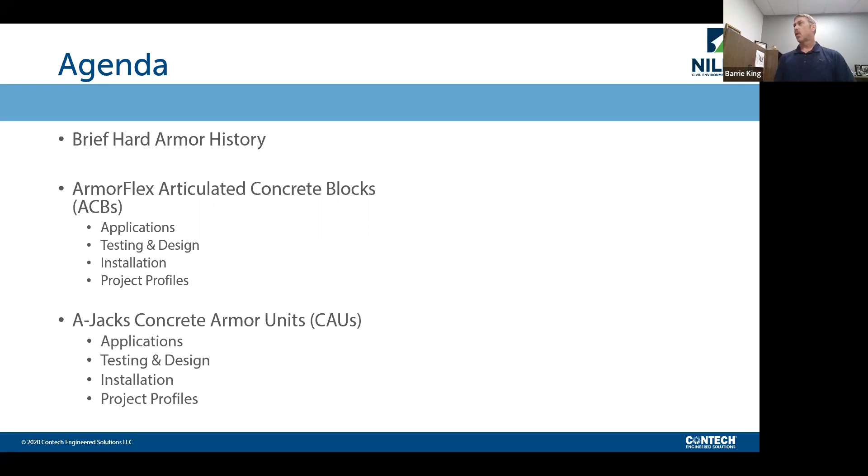Mostly for this presentation, I'll be focusing on the ArmorFlex ACBs. So if you have any kind of question, I believe there's a chat somewhere that you can access. You can put it in there to log it in so you don't forget it.

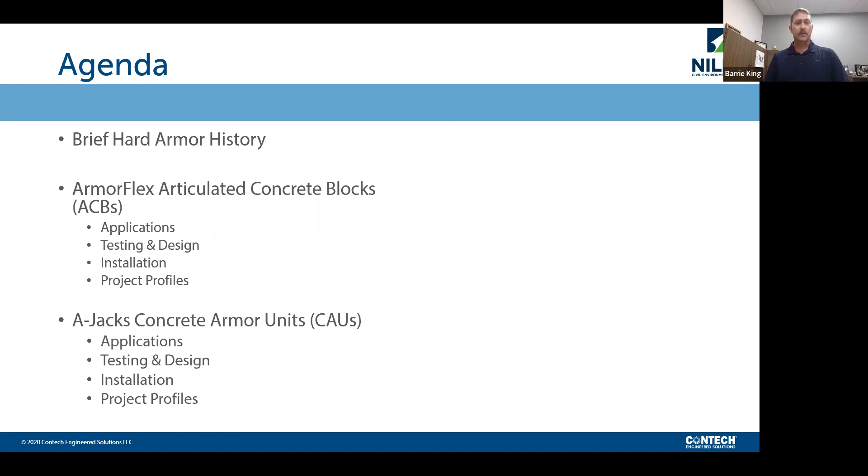Revetment blocks, ACBs, different names, but the same factor of safety, the same mechanism of failure. Here in North America, 1978 is where we started seeing them, and then you kind of go through the legacy there of testing.

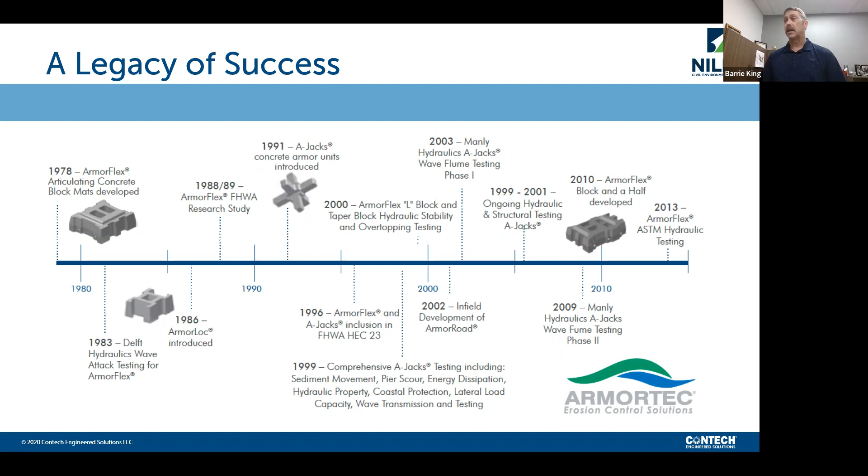So just to kind of give you an idea of the confidence you can depend on when you're designing these. As a designer, there's risk involved, not knowing where these systems come from, and more importantly, not understanding how they are in factor of safety. There's risk associated there, so I'm here to clear some of that up and show you what these can do.

Starting with the articulated concrete blocks, it's a flexible interlocking matrix of concrete blocks, uniform size, shape and weight, cabled together if you would like, for quicker installation.

I should note that cabling is not required in the factor of safety as far as ASTM International is concerned. It is considered a redundancy. We'll get into that a little bit, but a lot of it has to do with how do you test the tension actually happening in that cable if it's installed in a full-scale flume, say in the Netherlands testing lab, or Delft Laboratories, or Colorado State, my alma mater.

So they can be used individually without cabling. There is redundancy there with the cable. So specific hydraulic capacities are substantiated by ASTM testing, with not just the ArmorFlex type, but that is for all ACBs out there. Mattresses or hand placed, like I mentioned.

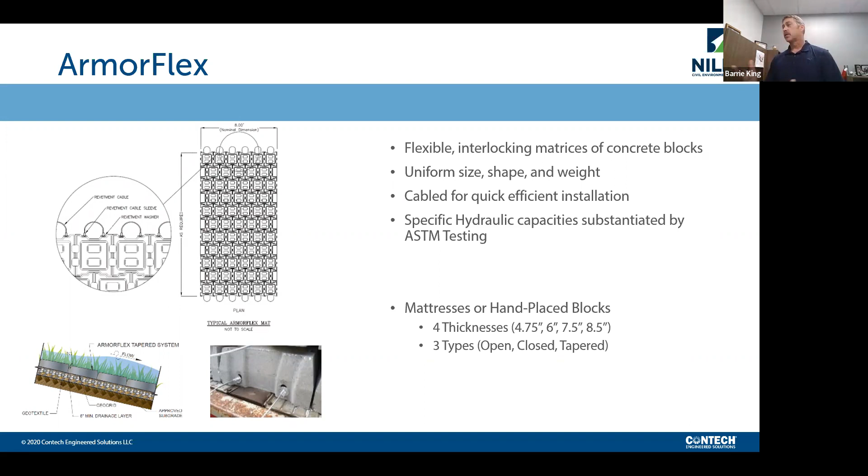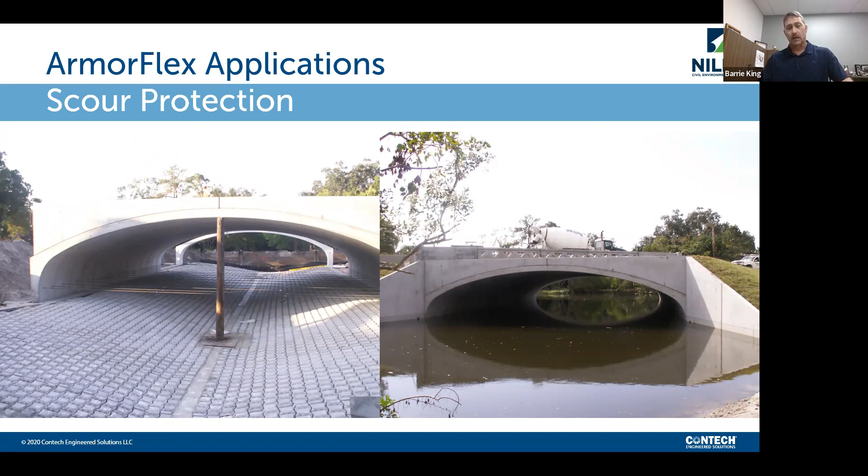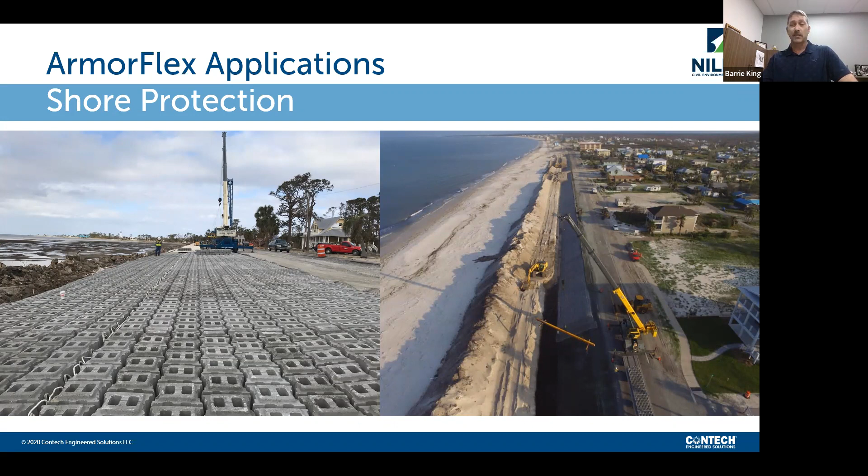And you can use them for a bevy of applications. Here you see scour protection. This is a full invert. And then shore protection, obviously. These are also qualified for wave attack, using Pilarczyk's equation for solving wave attack. That's kind of the guideline across the country, across the world really, and what they use to size revetment when you're seeing shoreline coastal challenges.

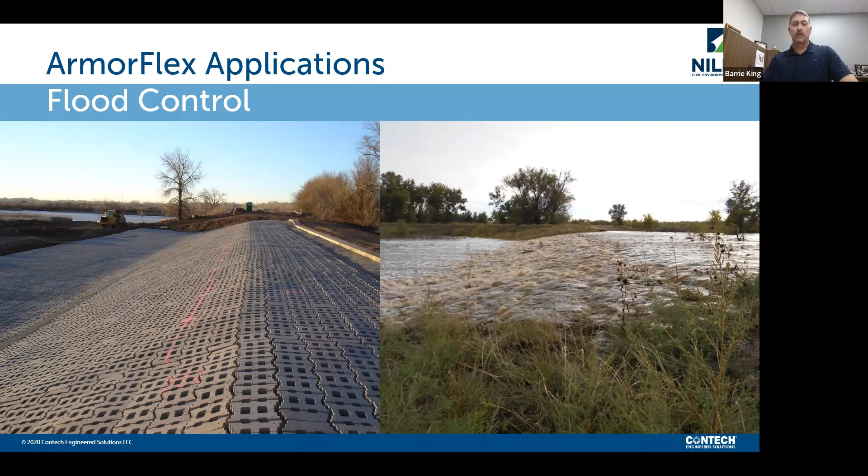Flood control. Here you see a low water dam. This is out in Colorado, Fort Collins. And then here you channel lining. This is, again, scour protection, but you can really get a sense, this is in Missouri, of the vegetation possible. They're on the left right after construction, and on the right 6 months through the growing season. That's what you have. If you look real close in that right-hand picture, you can see the block down at the water line.

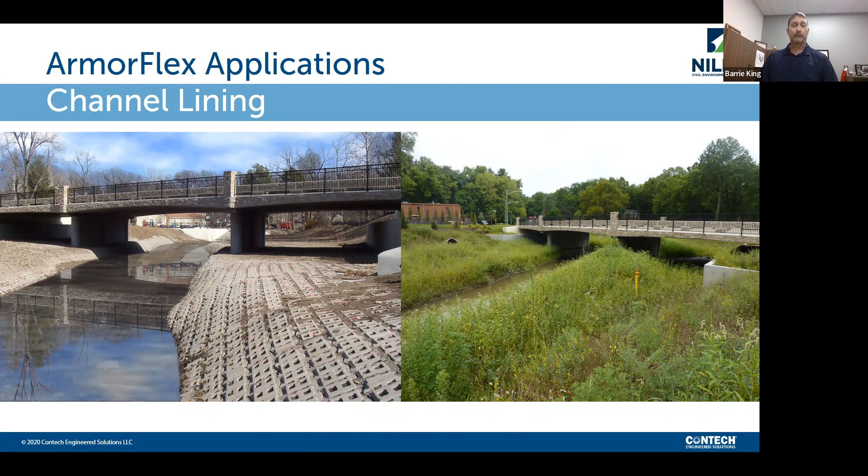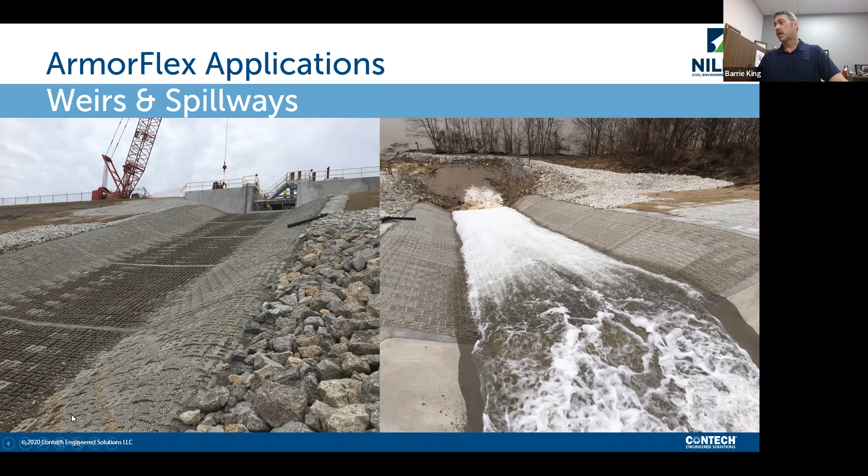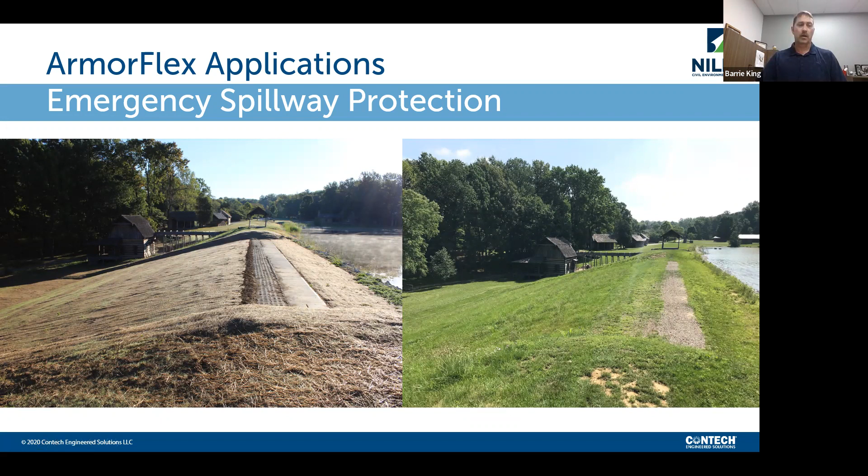And then emergency spillway protection. That's a bread and butter application that we see down here in the States and across North America really. And again, this site is more of a park setting, but it had seen flow, it had seen flooding. They needed something that would hold up to the PMP event, and also have it aesthetic to match the surrounding park, and that's what you're kind of looking at here.

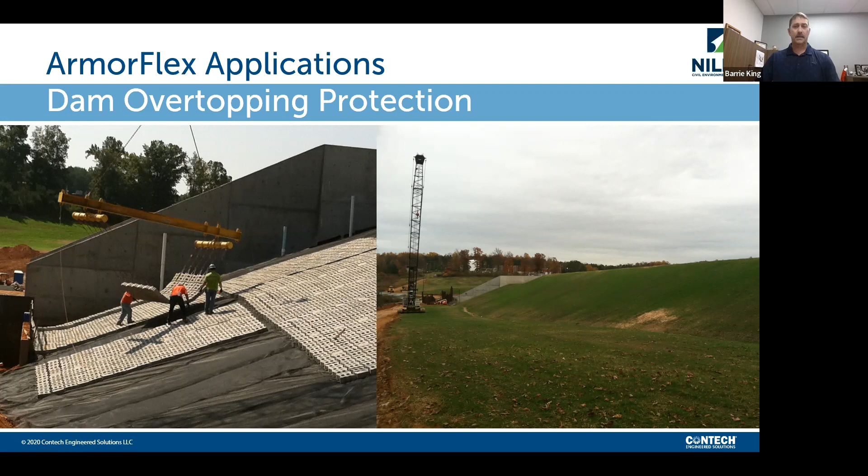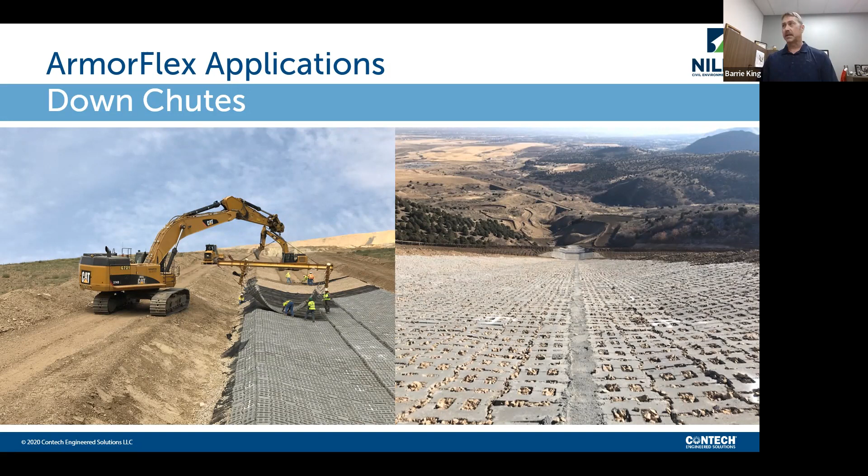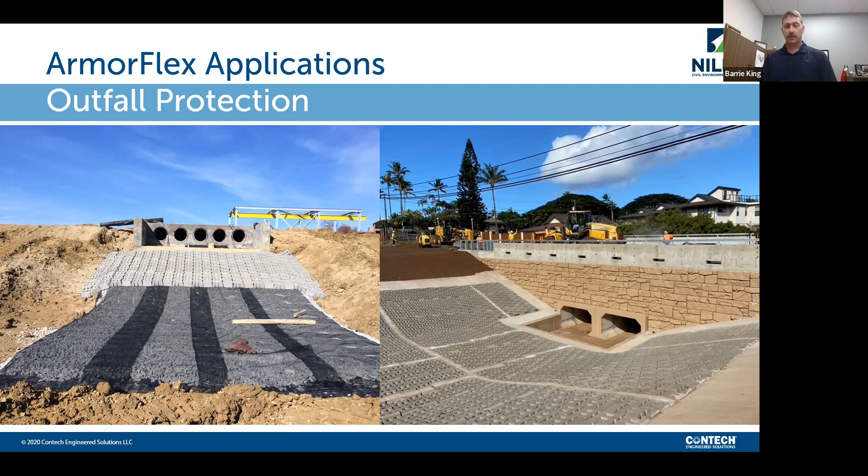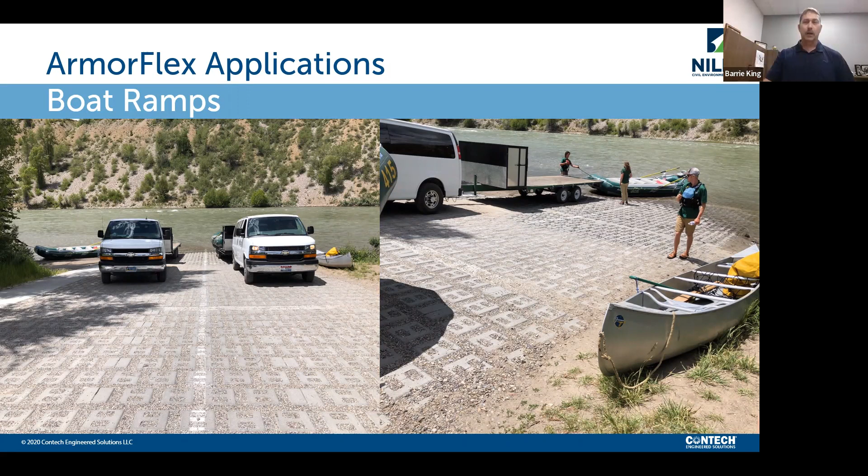Just a little bit of everything with these systems, the ACBs, and they're another very typical application you can see. When you're talking about boat ramps and low water crossings, you do want to think about your saturated soils and what you use for subgrade improvement there. Saturated soils don't behave very well for wheel loads, depending on the soil type. So typically when we see these, there is some soil improvement, i.e. crushed clean stone, maybe a layer of geogrid just to lock everything in and speak about longevity there. So yeah, another very typical application.

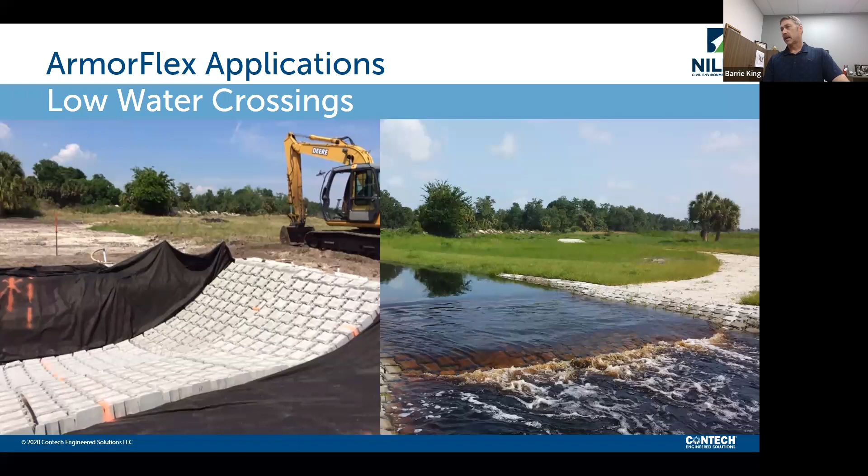But all these applications, they have to be based off something, right? And so testing and design, as engineers, as specifiers, that's very important. So you want to know the capacities of these systems you're using, whether it be a steel I-beam, a concrete channel, girder, or ACBs as erosion control. You want to know what they can do. You want to know how they've been tested. What are the redundancies there, and how conservative is the design? So things like that that we'll cover.

I will speak right now about ASTM International. This is an international standard. Well, it's international standards.

So when you're talking about ACBs and you want to know what they can do hydraulically, you have to look at compliance testing. And there on the left is D7277. That is the actual test - what you do, how you set it up, what grades you put your block on. And these are all full-scale tests.

So for our example, we were at 2-to-1, 115 feet long, and we put 5 foot of head on this dam, or on this channel, 5 foot wide. And the resulting velocity was upwards of 35 feet per second with shears of 20. So very strenuous hydraulic conditions there.

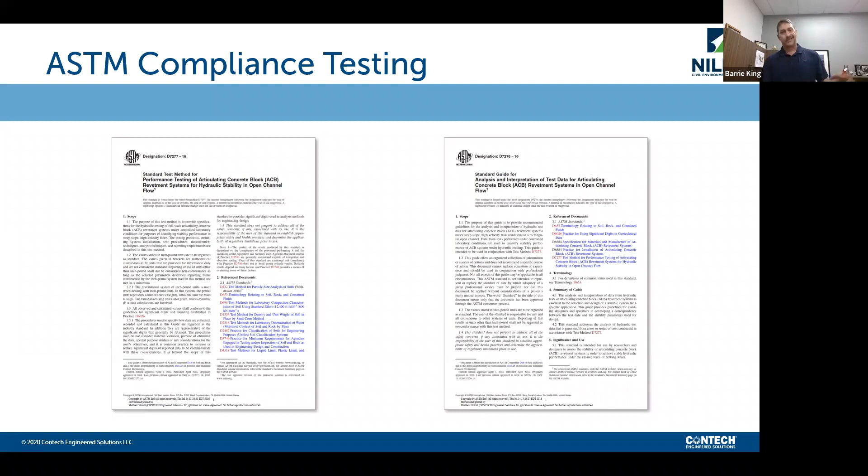So again, ASTM compliance testing, very important. It's worldwide, it's an international standard. Again, just to hammer it home, it's my one soapbox.

You know, you have your parameters, you know what your soil is, you do flow duration. So you do 1 foot overtopping for 4 hours. You check and see if there's any damage. You keep going until you have defined failure, which is loss of intimate contact - that is the system itself lifting off that subgrade. And that's what they measure.

And then you take those, and again, you take them into the next standard, D7276, and that's where you're doing the interpretation, determining the Manning's. What is your critical velocity? What is your critical shear? Things of that nature that actually are good to know when you're designing hydraulic structures and the like.

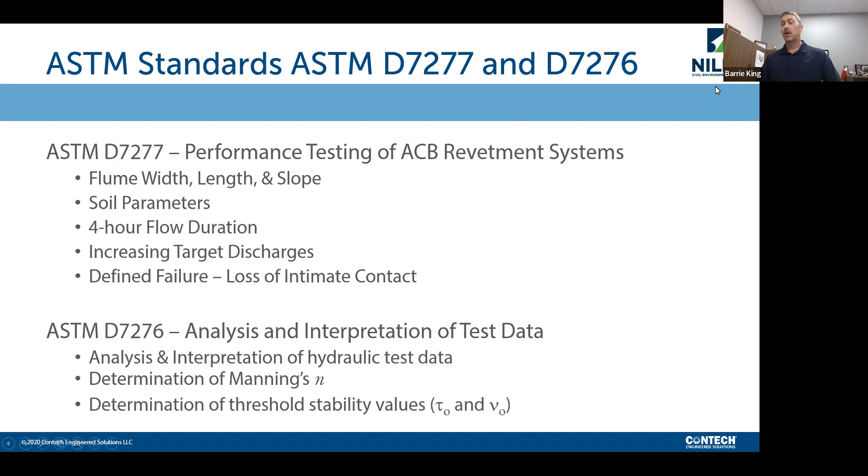And after all that rigmarole, and thank you for listening to my diatribe on testing - it's very important across the international design community - you will get something like this. This is Colorado State, Dr. Chris Thornton, director of that, and you will get the capacities. Now, this is the summary sheet, so it is a report detailing exactly what was done, how it was interpreted, and following as dictated by those ASTM standards we mentioned earlier. There's one way to test it, and there's one way to interpret it. This is kind of what you get.

So if you look down there on the right, we have 35.5 feet per second and 20.1 pounds of shear, at a 5 foot overtopping. That's moving some water. To give you an idea, I am - and I'm going to be kind to myself since it's right after Thanksgiving - but I'm about 6 foot, 200 pounds, and rule of thumb is 6 inches of water flowing 10 feet per second would take me off my feet.

That's how powerful water is. Everybody's done that, everybody's stood in the stream. Depends on your stance, obviously, but in general that's a good rule of thumb. Here we're talking about 35 feet per second, 5 feet deep at the head box. So that kind of puts your head around what that means physically speaking.

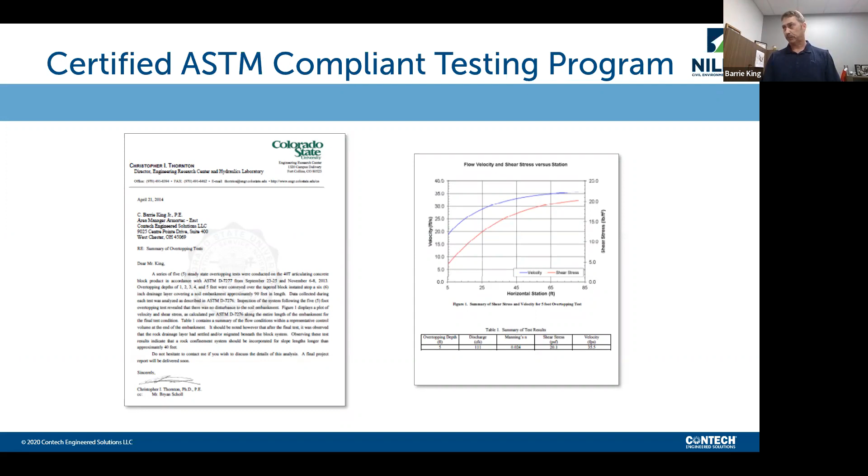And then when you get through all the testing, you get assigned your capacities for your system, whether it's ArmorFlex or another system. Again, everybody has to subscribe to this if you're going to use these. You have to go with your design methodology - NCMA, which is the National Concrete Masonry Association.

It's no different than what you're going to find in the federal documents with the U.S., or even over in Europe. I mean, you are going to see the same math. This is just a good, user-friendly way to interpret it and work through it. So that's why you see here - it's the factor of safety, is what it is.

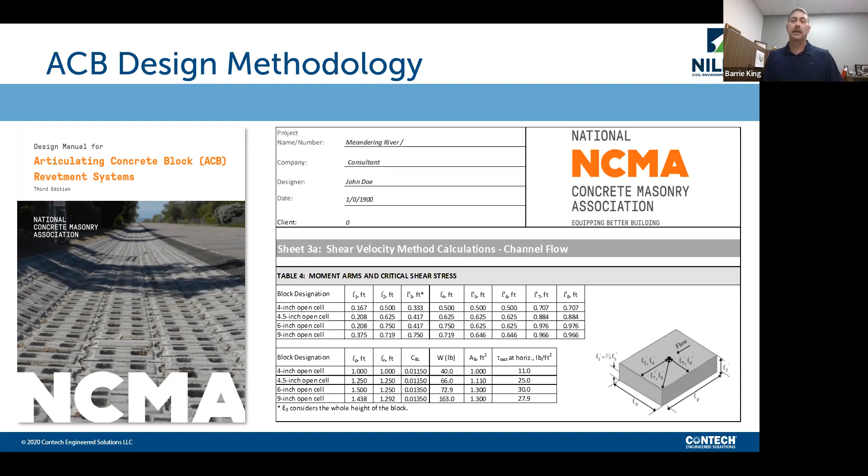That's for those spillways out in the monsoons in New Mexico, and for those steep channels down in Kentucky or up in New York that we're seeing them. And really, Pennsylvania is another state that has really put these to the test—let's build this, and not only are we going to build it, but it's going to see water on an annual, if not biannual basis, and it's going to see the design discharge. Seeing that happen really gives you a lot of comfort that everything you're working through the math on is really worth it and actually true.

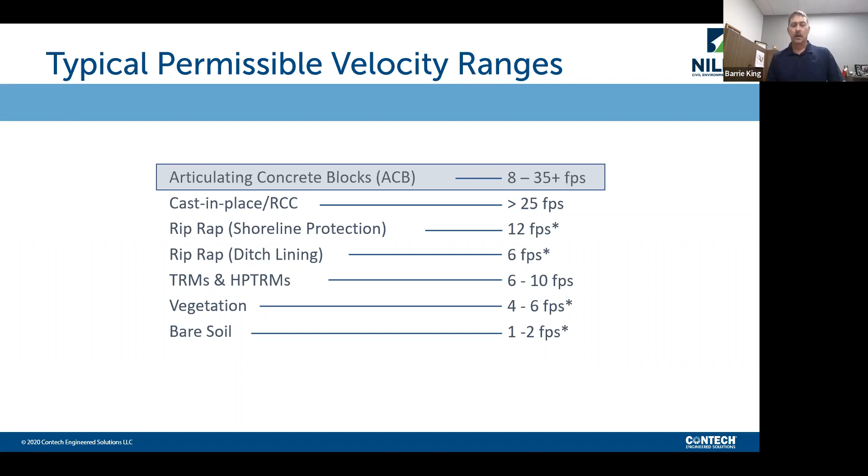A lot of times, half of that they expect to move. It does move, so you'll actually put a double layer there because the rocks are undersized since there is a gradation involved—you'll lose some of the smaller stuff, and the bigger stuff starts to tumble. This is a mechanism I used to see at VDOT, Virginia Department of Transportation.

We used to dump rock all the time—it was one of the big expenses of our district. So this is just a nice visual to show you as you move up in velocity into more severe environments, these systems make more and more sense. They can not only save money on material, but imagine hauling all that rock—especially nowadays that costs something. So looking at that cost benefit of what can be done there, that's really what can swing a project sometimes, because budgets mean, if not everything, they mean a lot.

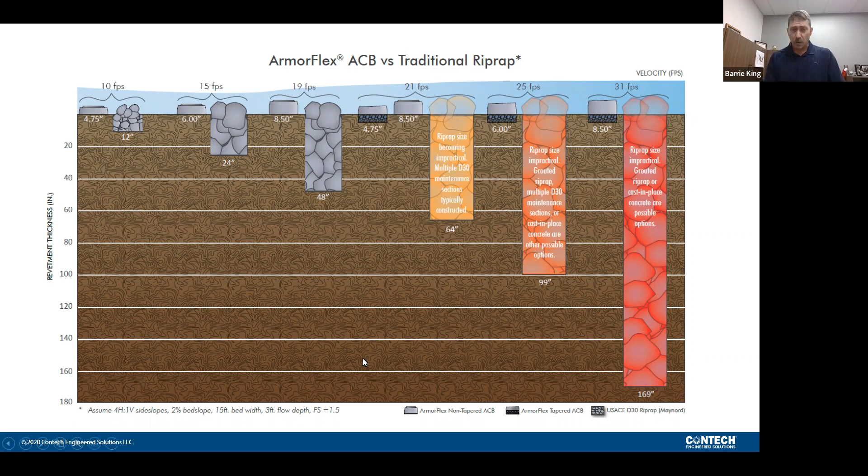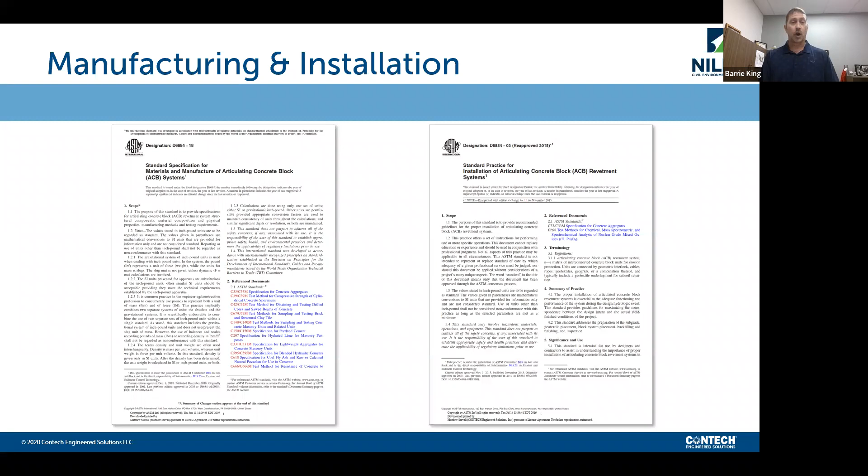But in this case, it provides comfort, because you're used to using rock and maybe cast in place and some other materials, and you want to know this isn't just something out there in the ether. This has been vetted, and there is a way to manufacture it, a way to place it. Again, a big dirt job—it's all about having the competent dirt and getting those proposed grades hit, and then you armor them with something for the design flows.

So another slide on ASTM manufacturing—everything's covered there, QA, QC, it's all listed, the cycles and the molds. And then 6884, that's the installation. There's not a question of 'hey, is this okay, well let me see'—okay yes that's okay, or no that's not okay. You have to get it to this compaction or whatever that is.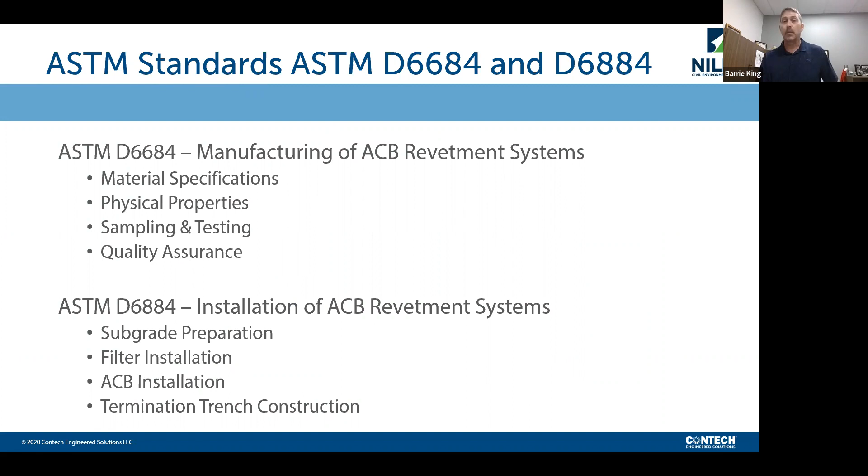So ACBs according to ASTM—you hydraulic test them, international standard, you run the analysis on that testing, there's an international standard for that. You do the design—there's many, many methods. I showed you NCMA, names for the method, but they're all the same method. The factor of safety is the factor of safety, the numbers are the same. NCMA is easiest to follow, but that's what the ASTM input provides.

You have to have the input from the previous testing to use that method. And then you go to manufacturing—okay, how are we going to make this? Do I make it like this? No, there is a manufacturing specification, very stringent for it, compression, absorption, any of that stuff. Installation, again, same thing. So thanks for listening to the ASTM part of it, but it is very critical, and you should know that has bearing on what these systems can do and how they are used.

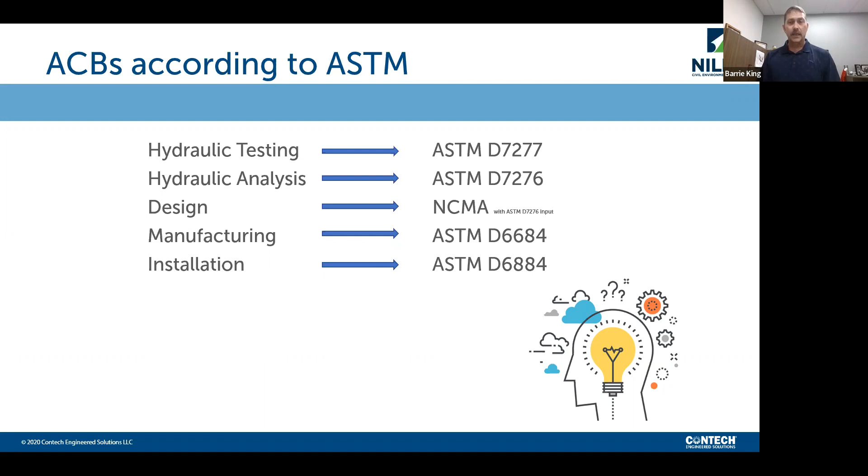So project profiles—see some things that were built here, near Herbert, Saskatchewan. I like this one, the Highfield Reservoir—it's really a flood control system, that was the problem here. You have various levels of protection, and what I mean by that, if you look in the left-hand picture up there in the top, you see that green—those are where the hydraulics aren't as severe, and you can use maybe a softer armor, something more cost-friendly to the site, because you don't need big bad ACBs or ArmorFlex since hydraulics don't dictate them.

And that's really what you need to understand about what to expect from Nilex and Contech: over-design is fine, but budgets are budgets. So recognizing where a softer, less expensive, high performance turf reinforcement mat or something like that fits, and recommending that for the site, whether on the engineering side or after it's been bid, that's critical. And that's what you're going to get here.

That's what I like about the Highfield—you're using a little bit of everything here. It had a tapered system, a combination solution, like I said. The support were the specifications, running the factor of safety, contract drawings, working with any kind of on-site installation assistance that was needed. The outcome, and we would know if it was bad, was the efficient installation, always finishing early.

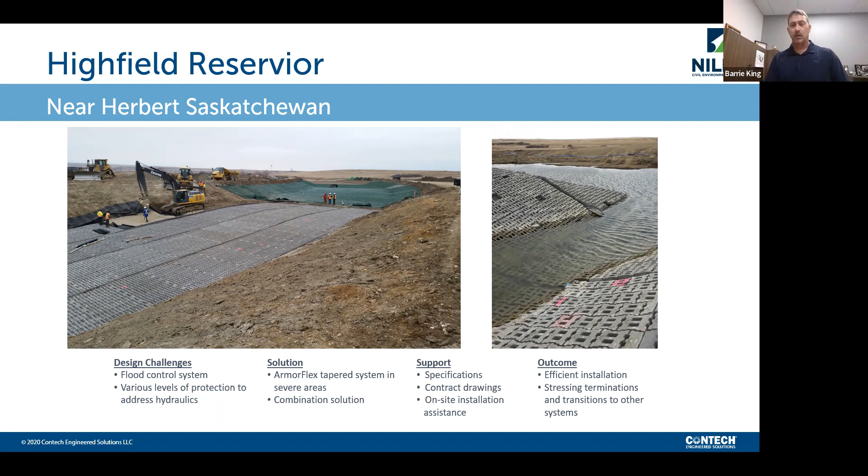Jensen Dam, something more project that's probably more recent. McGrath, Alberta. You can see the project location there on the right. This is a really good shot that was taken. A lot of things going on with this project.

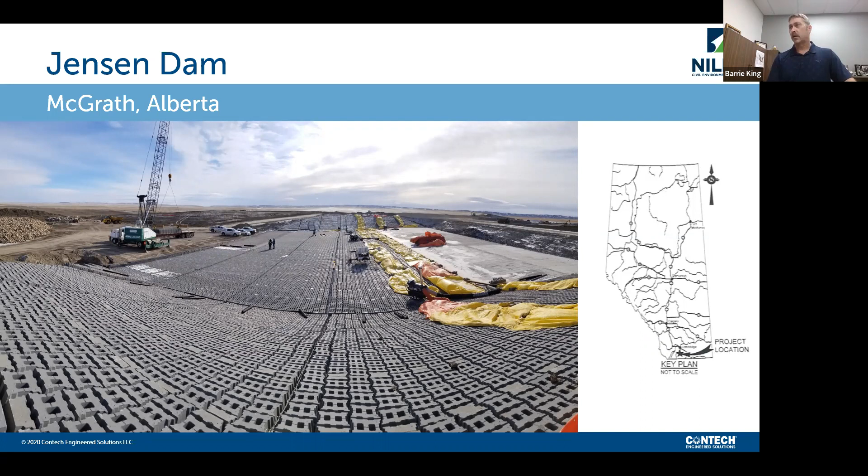The history of this site and what went on at Jensen Dam. I believe it always saw some kind of water. With the redevelopment going on in the surrounding area, more water was going to be directed into this area. So they needed to make sure they had a weir or channel, a fuse plug design that would work and pass this on a consistent basis. So at Jensen Dam, this is really what you're looking at in cross section.

Design challenges: the access was remote, the weather was tough during construction, and the timeline needed to happen fairly quickly. You get all that together and it makes for nervous contractors and suppliers, because we want to make sure everybody's hitting on the same cylinders and in lockstep. We really want to make sure we know what each other is doing, same with manufacturing. So having that dance going, trucks coming in delivering material, that being set, and more trucks replenishing - that's really what we shoot for, and what happened here on this site in McGrath.

It was a 70T system, a tapered system for the hydraulics, channelized configuration as you can see. The support included the contract drawings, on-site installation assistance, and our engineering services.

There were many iterations of what was okay - hey, we're going this wide or this wide, and do we still pass factor of safety? As we all know, plans from the ministry, or in my case the Department of Transportation, when I see plans like that, it's construction in heaven. We all know this as professionals in this construction business - plans are great, you've got to have a guideline and hold to that as much as possible. But things change, especially in these big dirt jobs, so you have to be responsive. And that's one thing I'm proud to say - Nilex and Contech are quick to see problems that can mean cost on site, and take care of those expediently.

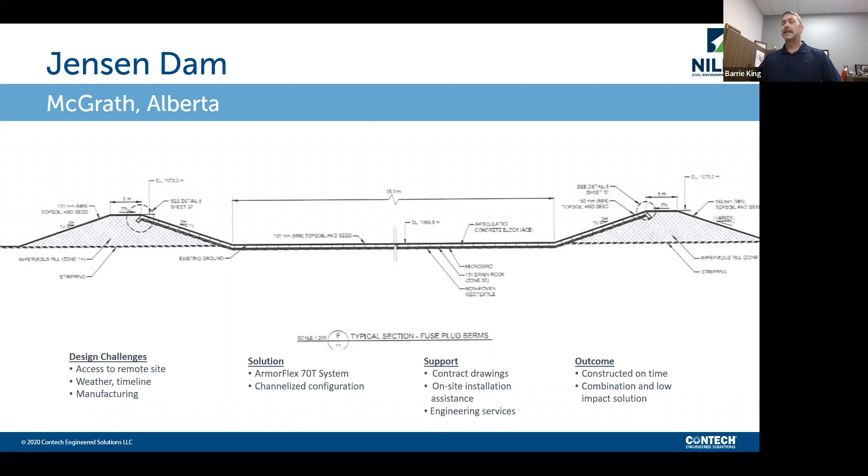More pictures here, you can see what's being done. See the snow in the background. I like this picture because it's conforming there - you can really see the articulation on the right-hand side. There's a big crane there, but it doesn't need to be a big crane. We commonly see excavators placing these systems. Here it was, hey we're going to set up and reach everything, and they had it on site.

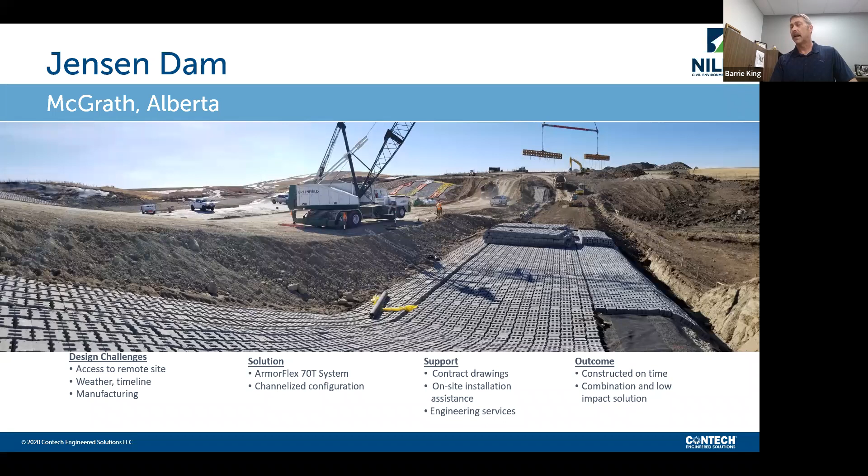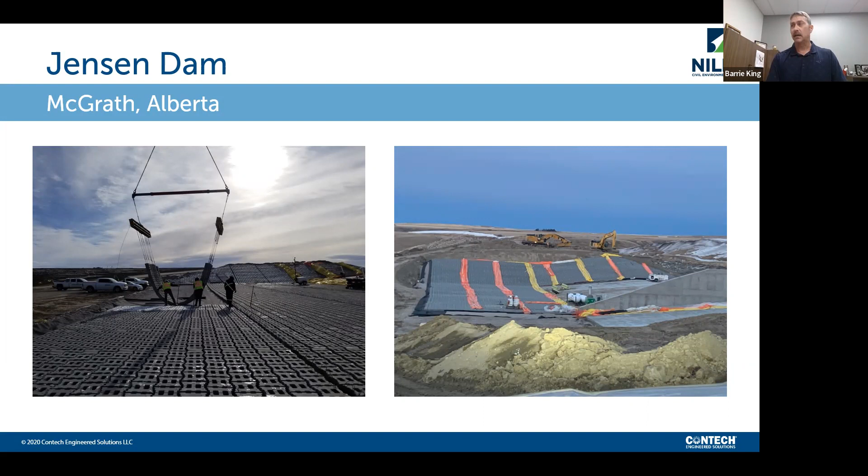So here's another application - Banff Legacy Trail flood repairs. As the flood went through in 2013, there was a really bad event that came through this area. I know Calgary is seeing that design being implemented now, similar to what this experienced. But in June 2013, they blew through here and just destroyed this whole area.

They needed to rebuild the trailway, and that's what you're seeing there. On the right-hand picture you can see it better - there's a trail paralleling that road, and cyclists go through there. You have this grassy slope, and after that got blown out and all that rock moved, they wanted to come back with something that would really promote vegetation. In the left-hand picture they're marching down station with the open cell ACBs, backfilling with loamy topsoil as you see on the right, with the ultimate goal of growing in native grasses and wildflowers.

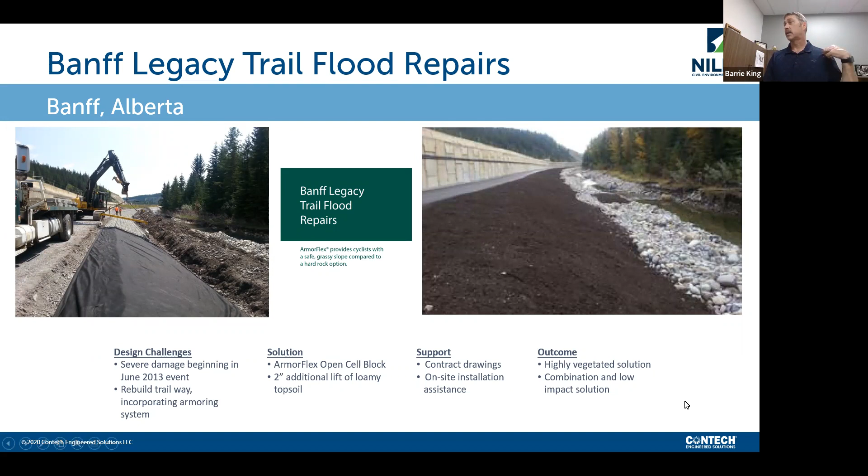That's always something I get a question on. If you plant those in the middle of August, say in Mississippi, you're not going to get much growth. So adhering to the growing seasons, oftentimes we'll see ACB open cells being placed in the winter and not backfilled or seeded until the growing season, because everyone knows you're not going to grow anything in the middle of February. So a very beautiful area and a very successful solution there for them.

Exshaw, Alberta, channel lining, bridge scour, a little bit of both here. You can see what's going on there on the right. It's about that train and about that infrastructure coming through here. It's a large drainage area, very flashy conditions, critical infrastructure, like I said. ArmorFlex.

70T, large riprap transition, as you can see there on the right. So in the less effective areas, flow ineffective areas on the top of the slope, that's where you can get away with something more dissipative. Again, same support, same outcome, but efficient conveyance here on the outcome. This fills up quickly and they needed it out of there. So a little bit less roughness with the ACBs provided that. It's not much smoother than the rock around it, but enough so you can play with your depths and make some efficiencies there. In this case, it made the difference in the design.

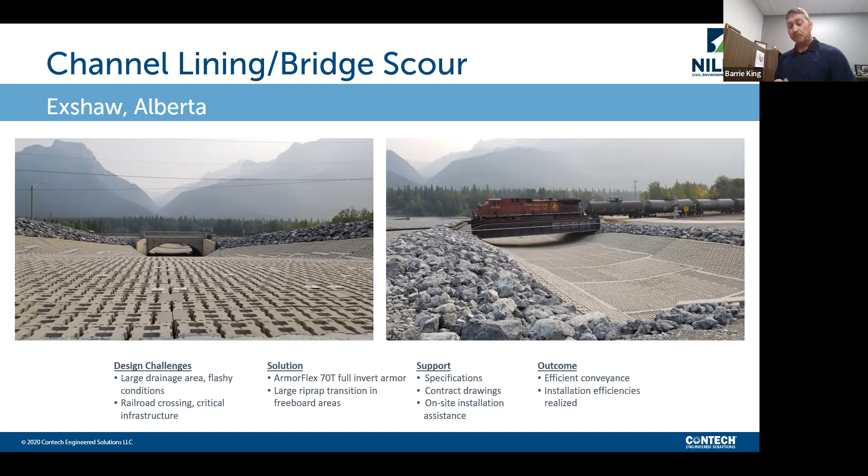Yeah, that's what I have for ArmorFlex right now. Again, just a really efficient system to get down with Nilex and Contech. You're looking at everything from layout drawings to factor of safety calculations, all that stuff is available. It's really about improving the confidence and improving the conservatism of these systems and what they're kind of adhering to.

And with that, I'm going to look at the chat.

Real quick, I got these questions on the ACBs. Is there fill in with the grid in the second section? There does not have to be. This is a great question, and I'll go back to the installation guideline, ASTM D6884. It speaks directly to the fill. There is geogrid in the second section, and that is for those higher velocities, those stones - they could have the potential to be excavated out through the open cells. So having a confining grid there is not for strength parameters or subgrade improvement. It's really a screen to keep those in place. The gradation on the rock is 1.5 to 2 inch minus with no fines - that's what you look for there.

Let's see, okay. And what I'll do, I'll just move on right now. Great questions, very common questions that we get. So let me go ahead and close that.

A-Jacks, what are they? They're funny looking. You played with them when you were kids. Just kidding, I'm not from the 1940s.

All joking aside, they are an energy dissipation unit, and I'll go through this quickly. But they're really something to look at, and by all means, very effective.

Interlocking high stability armor units - they come on pallets, they come on skids, so they're easy to get to the site. You do random and uniform installation. The only difference is with random installation you'll probably use about 5 to 10% more. Uniform installation is actually quicker to install and you use less units. You can do hand place or bundled placement, put them in groupings, like you kind of see in that top left-hand picture. It's a very rough layer - if this unit is fully exposed in the water column, it has a roughness of 0.1, okay, but how they're commonly used, we'll talk.

So that's fully exposed, water blowing through it. That's how they're tested to get their capacities in full scale.

That's from tip to tip, how they lay down when installed. 2 foot, 4 foot, 6 foot, 8 foot, and 10-foot units are available.

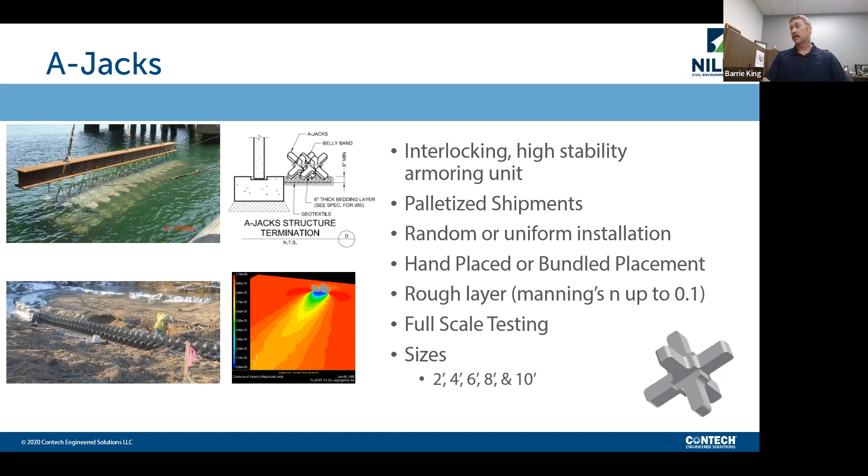So A-Jacks: scour protection, pier scour protection, and abutment scour protection on existing piers.

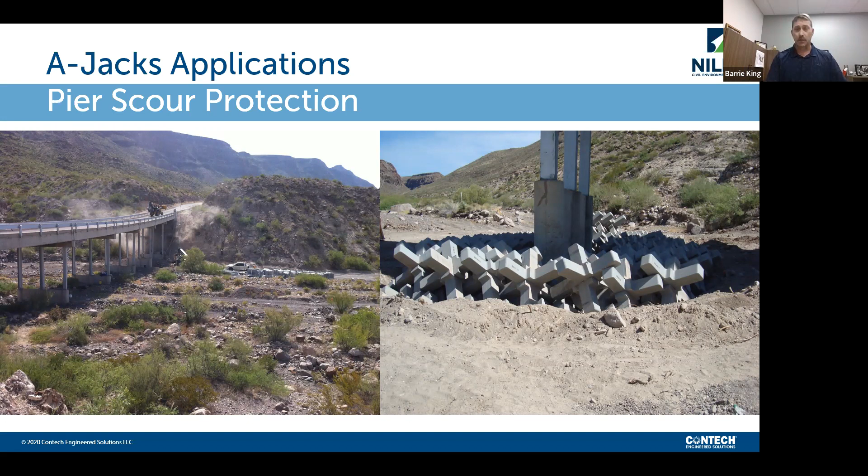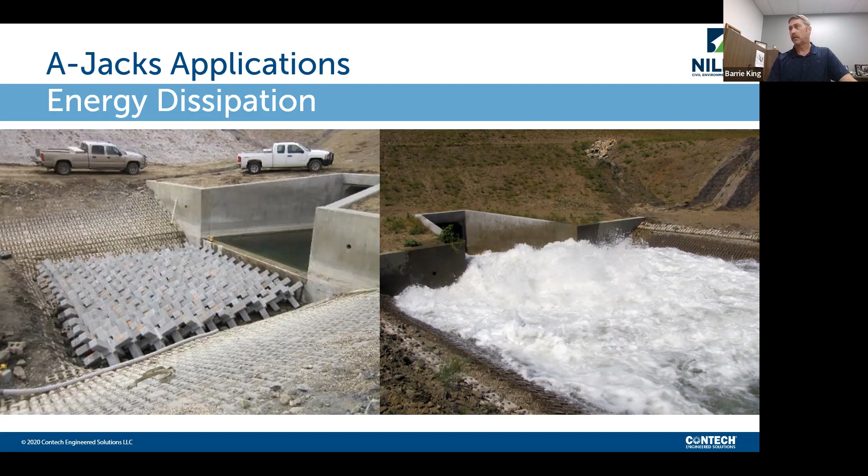Energy dissipation - this is an agricultural application, downstream. They turn this on and have to get it to dissipate before it goes downstream, because what was happening was it was tearing apart the sandy soils downstream. Velocities were too high.

Toe stabilization - yeah, they're on the left. You can see the softer cocoa mats being done, and then right at the waterline are the A-Jacks.

You see that in a lot of fill applications, or where they do impoundments or drainage areas or retention basins. You'll see that at the waterline sometimes, and that's where you're going to see erosion. What'll happen is it'll eat away at that, the bank will get steeper and steeper, and then it'll fail, and then it'll happen again.

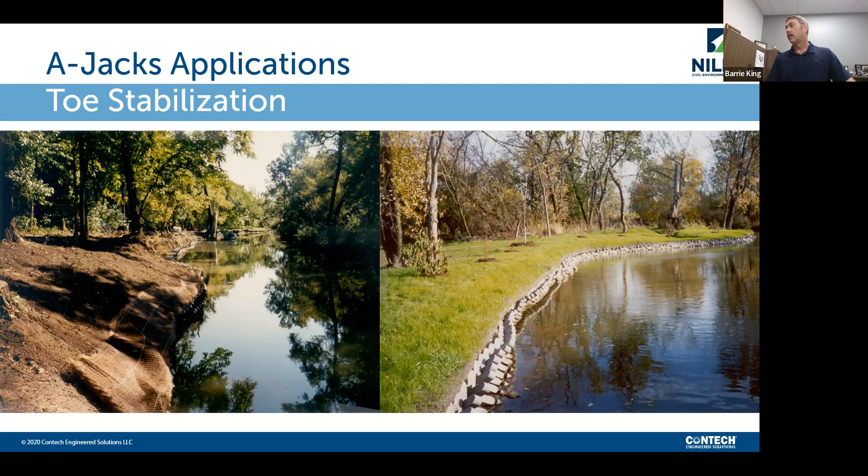And so you get that backward encroachment into whatever is there. Is that important? Is there a structure there, or is it more like you see on the right, where it's more of a rural area? So it depends.

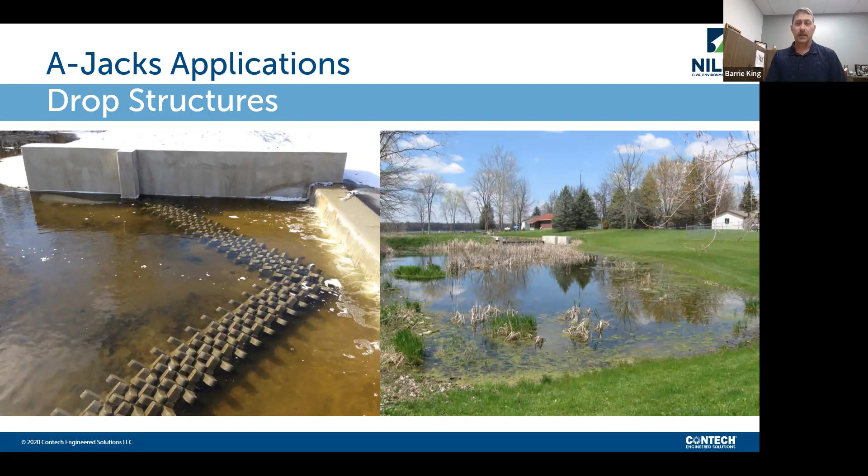A-Jacks, the drop structures - all kinds of configurations you'll see to dissipate energy. There on the left is downstream of a weir. There on the right, that's the application you're seeing in the background. They needed to smooth out this flow in the design event because it was tearing up this detention basin. Breakwaters.

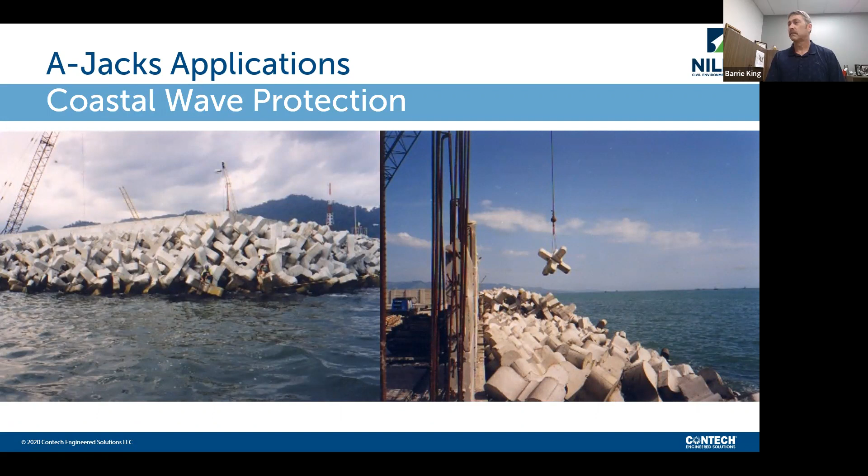Coastal wave protection and testing. So to get into the testing, everything from wave attack testing to channelized testing, all of that has been done with these systems ad nauseam.

The structural analysis was done in Auburn, the impact testing I believe was done at the University of Florida, stability testing at the University of Florida, wave attack testing by the Delft Laboratories out of the Netherlands, and pier scour testing done by Oregon State University, with a gentleman named Bill McDougall, who was one of the forefront people in wave attack design and countermeasures.

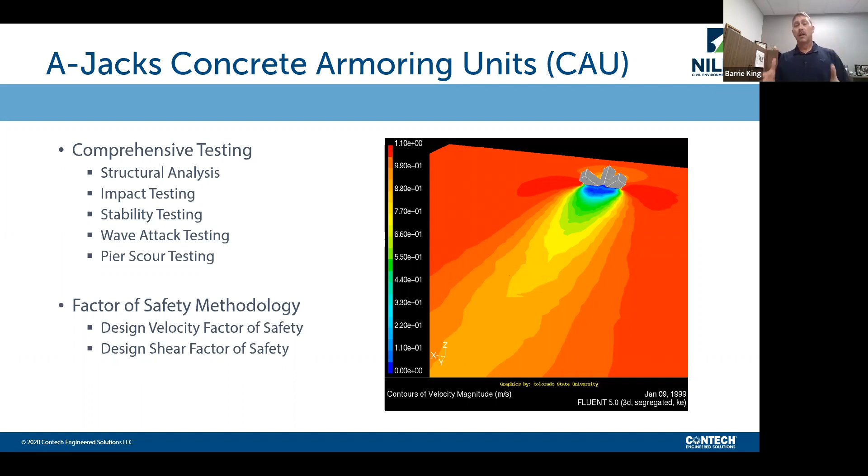So, factor of safety methodology, velocity and shear - the biggies when it comes to hydraulics. What's your velocity and what's your tractive shear? What is shear trying to scour out of that channel?

So design - I wish this was really earth-shattering, but it's not. It is a particle in space, and you're trying to overtake that particle and roll it downstream. You have a lift force, you have a drag force, and you have the other A-Jacks rubbing against them and creating some friction.

The only thing that is stabilizing, the only thing that we know, is the interblock restraint and gravity force normal to the slope. Everything else is the capacity of the system. So it's about rotation. And if you think about it, these are set in a continuum - once they are in this kind of permeable matrix, it's very, very hard to dislodge them.

I've seen them go way above the design velocity and be just fine. So it's intuitive - you have this jack and they're kind of all bunched in together, but water can flow through. It was intuitive for me, and then when I saw it tested and actually saw it in use in the field, it becomes very obvious.

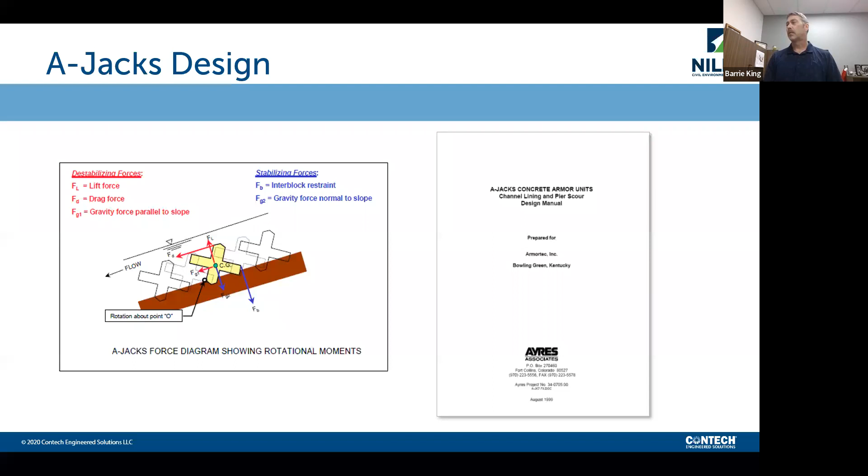So for pier scour, HEC 23, if you haven't heard that before - that is the pier scour guideline for existing structures here in the States by the Federal Highway Administration, design guideline 19. I can send that to you.

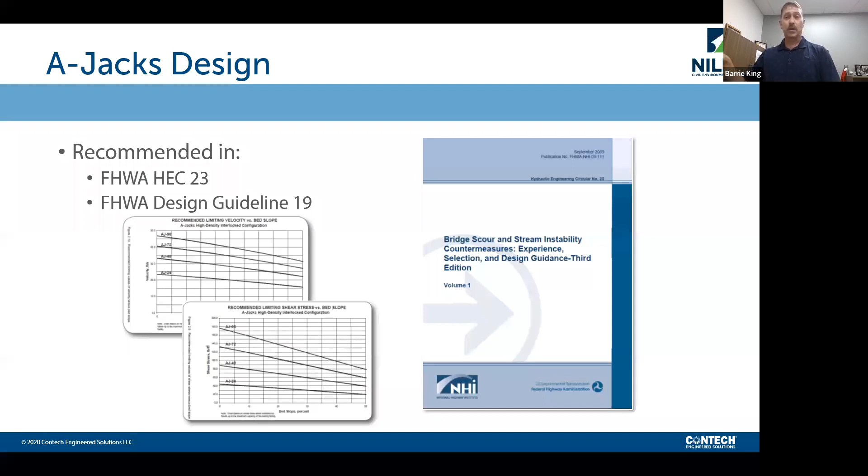And that is, hey, I have an existing bridge, got some massive scour, I have been putting rocks in here for months and years, and they're all going downstream. I need something more permanent. That's when you need to start looking at these systems.

A project profile - Lewiston, Idaho, you can see what's going on here. It's one of the 10 most scour-critical bridges in the state. They were going to lose their piers - they were getting massive scour holes.

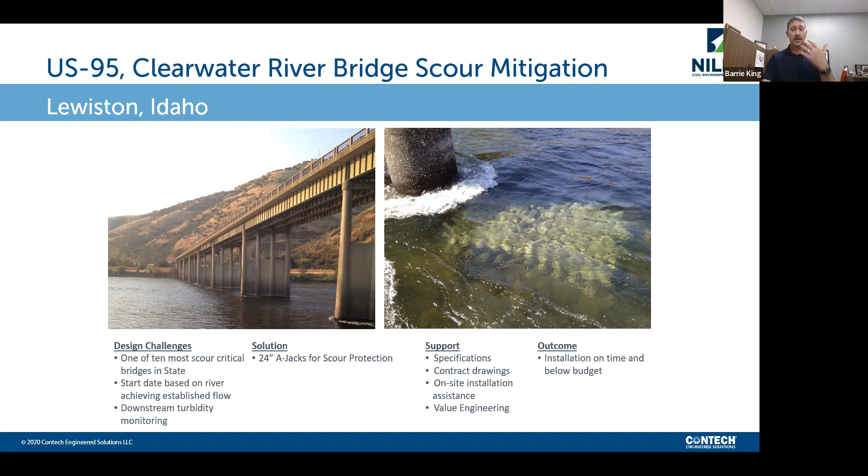This actually won an award. I went back to it because it won a state award and a national award because they monitor this yearly. We look at the reports and you can't see the blocks anymore. They have bed material over them. They've disappeared, but they're still there. They haven't moved. The elevation at the top of the bundles is still the same today after, I think these were put in about 15 years ago. So yeah, they have been intact for that long in the scour pad that they were developed for. No more scour holes out there. So it doesn't work everywhere, but when you have a problem and the maintenance is becoming unattainable, it's something to look at.

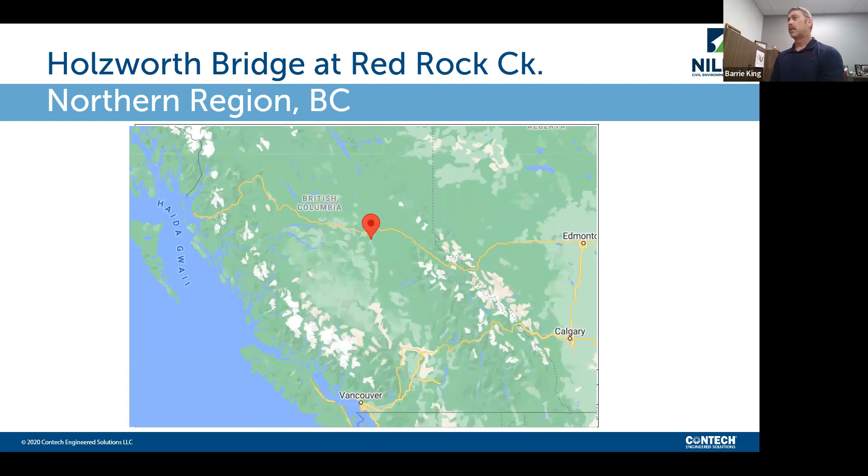Holzworth Bridge, Red Rock Creek. This is a design that we assisted in. Unclear if it was built, Northern Region, BC. Believe it went to tender, but just a very good application. You can see where this is located, fairly remote. They had this bridge structure. They had seen massive flows through here, and let's face it, some of the bridges weren't wide enough, and we all experience this no matter where you live in the world. Sometimes a shorter bridge, that's what we had the money for, right? And so that happens.

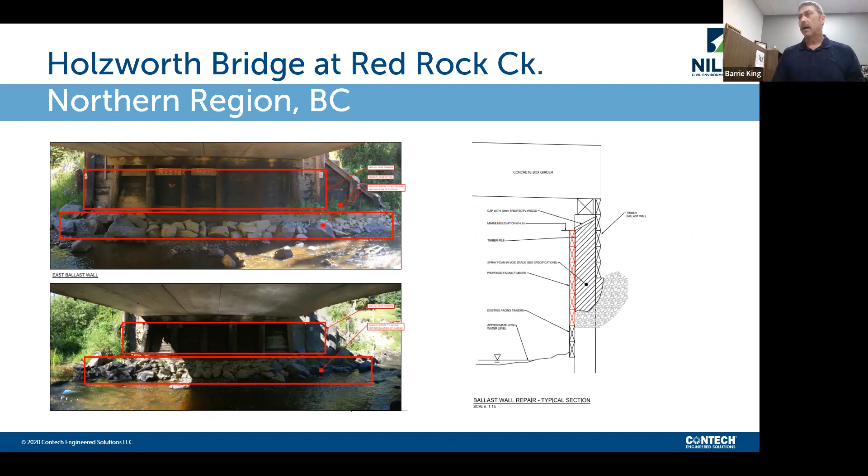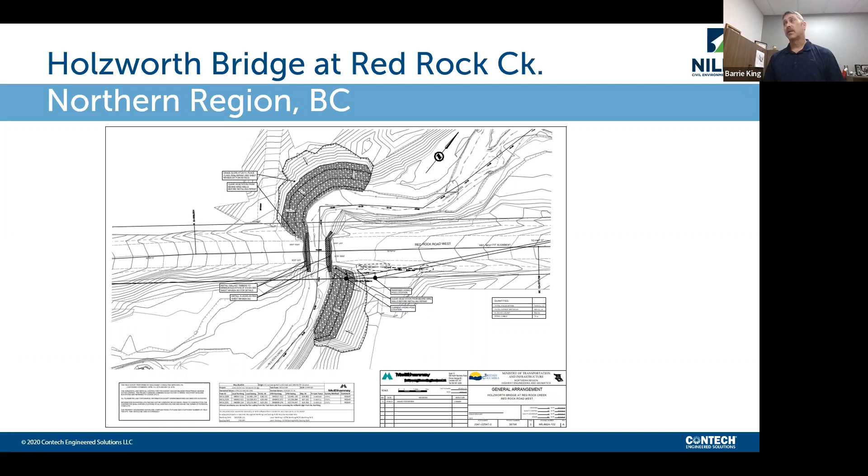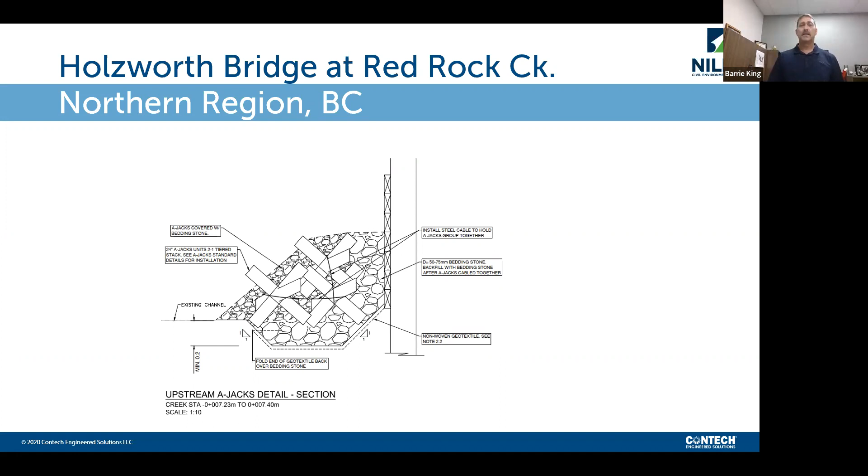And so when you have those applications such as this, and you're seeing the traditional methods like the rock going away, which is what was happening here, you need to look at some other things. In this case, it's a combination. On the top of the page, you see where the riprap is curving, that big riprap section there. And on the downstream side, you also see it. But inside the barrel, where the foundations are, the rock wasn't staying, and they needed to go with something more beefy. So the designer at McElhanney contacted us. This is the section they went with, and it's absolutely tailor-made design and application for that system. I hear from contractors, wow, these are really odd looking, and then about a half hour into the pre-con, or we have a discussion, they're like, oh, is that it? They're that forgiving? Okay, because the spacing is acceptable and different. So you can place them, and they might not look perfect, but they don't have to. They are made to be redundant and take some heavy velocities. So that's what you're seeing there.

The 48-inch A-Jacks bundles, they were 48-inch units, so laid down, they were 3 foot high. The size of rock that was designed for this, I didn't include it because it almost looks too ridiculous looking at on a presentation, but it had multiple D50s, and the total section that they used, that met the factor of safety per HEC-18 and every riprap equation you want to talk about, it was upwards of 12 feet thick, and they were going to have to excavate down, dredge. So to look at HEC-23 and know there's another solution out there, and to get that put in and watch it see the floods that have happened in the last 2 years, and these are exactly where they need to be and where they were set, is really satisfying. So yeah, this was a big bridge. I say that just because of the Mississippi is so mighty, and I know that they have mighties up in northern Alberta and all over Canada. So just know that even the strong stuff, we can combat that. We can possibly help you out. I mean, that's what Nilex and I are here for.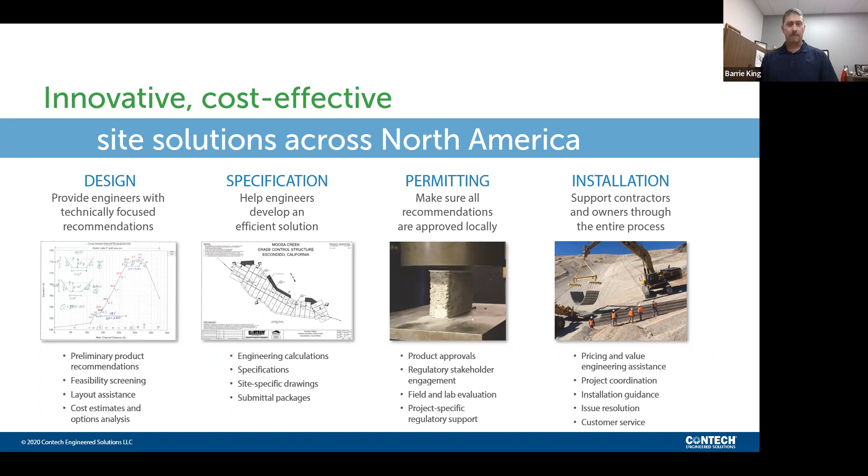That's really what I have. That was a lot in a short amount of time. I do appreciate you guys having me, and I'll entertain any questions whatsoever.

I do see someone here. Okay, yeah, Alan Strecker. Okay, here's a question—let me make sure I got it. Alan, how big were those A-Jacks units in the test flume?

That is a very good question. So we tested 24-inch units in the flume. Couldn't move them a micron. So we reduced it, because there's a thing in that—in the Colorado State testing, across the Delft laboratories—that Froude scaling they use, that I always have to have Dr. Thornton run me through. To extrapolate up using the Froude scale, they ended up really getting the best capacity out of the A-Jacks.

They made quarter scale, 6-inch units compared to the 24-inch units. They were made of concrete, so they had the right unit weight. They tested that in the flume, and the 6-inch units handled 15 feet per second. They weighed like 5 pounds apiece, and a 24-inch unit is 75 pounds. So I'm not saying it's a linear relationship, but that gives you a sense of what was done. I hope that answered your question.

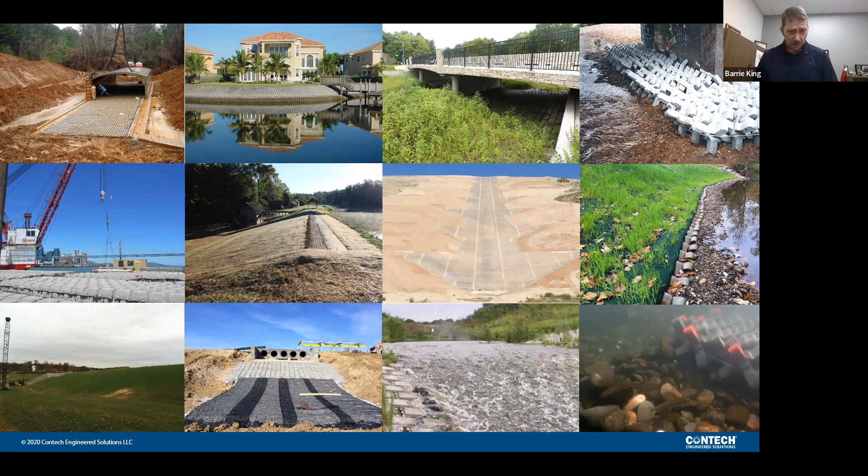Did they try to drop a geotextile on the scour before putting the A-Jacks bundles on the US 95? Great question—let me go back in time. If you look at that bundle, that's one of the things, and you're really picking up on something here. You can incorporate the geotextile with the bundle, and that's what you're seeing there.

In between the bundles, there's tolerances because there's some bunched up overlap there. By the applications we've seen, by the scour reports we've installed these on, there's a 4-inch clear space you can put between bundles. I know I'm getting in the weeds here, but this is a very good question. You incorporate the geotextile with that, and then there's tolerances in between the bundles—usually 4 inches. That is acceptable and proven, because in those little voids, everything's so rough around it that you just can't get any velocity to move in there.

Let's see here. Sam, thank you. Yeah, and Sam here is for the ArmorFlex product.

Who should we contact for technical questions for price quotes? Please reach out to Nilex first. Know that they're your first call, and know that I am right there behind them—that is my job. But the relationships up there with those local folks, that would be the first place to start. I'm located in Cincinnati, Ohio. I travel all around the U.S. for these systems, and internationally.